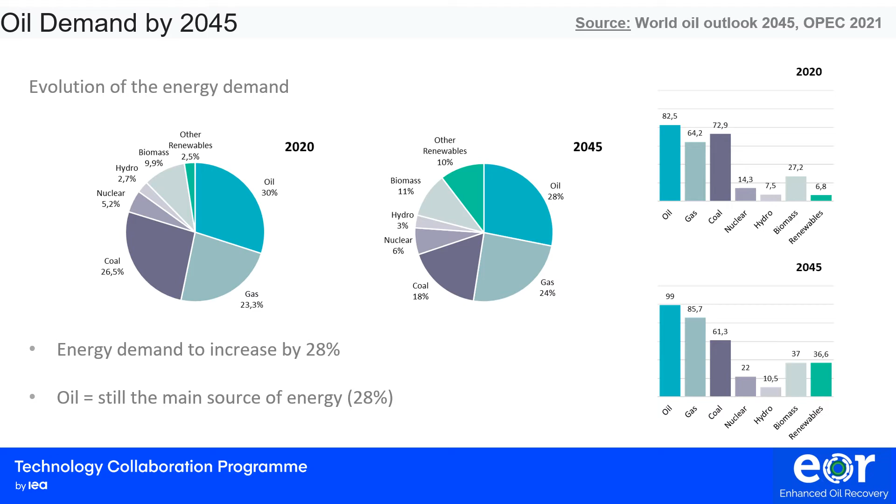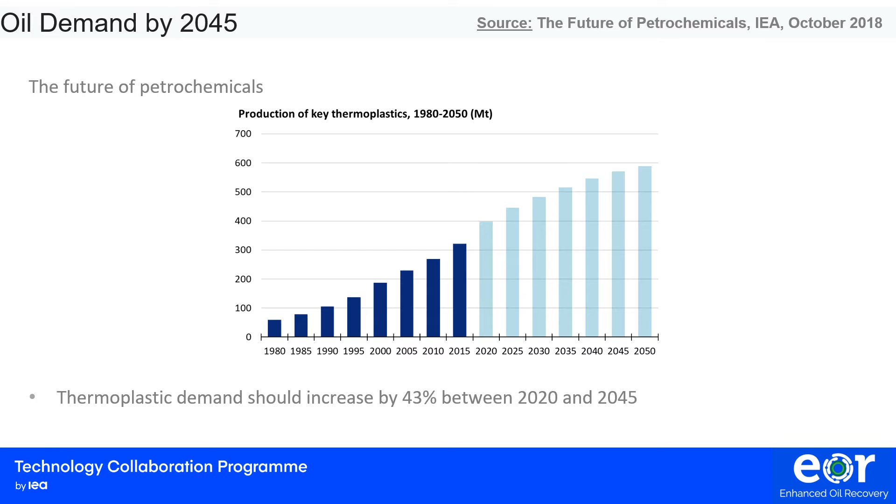Now, if you look at the evolution of the demand for key thermoplastics in the industry up to 2050, you see a constant increase, about 43% between 2020 and 2045. Accordingly, you will also have an increase of the demand for oil for this application.

So if we summarize, we should experience an increase of the oil demand by 20% because of the increase of the energy demand. These projections are even stronger according to the IEO, which reports an increase of the energy demand by 40% in 2045 and an increase of the oil demand by 36%.

We should also have an increase in the demand for thermoplastic, with more requirements and more demand on oil to satisfy this application. So now the main challenge is how do we satisfy the oil demand while oil production from mature assets is declining.

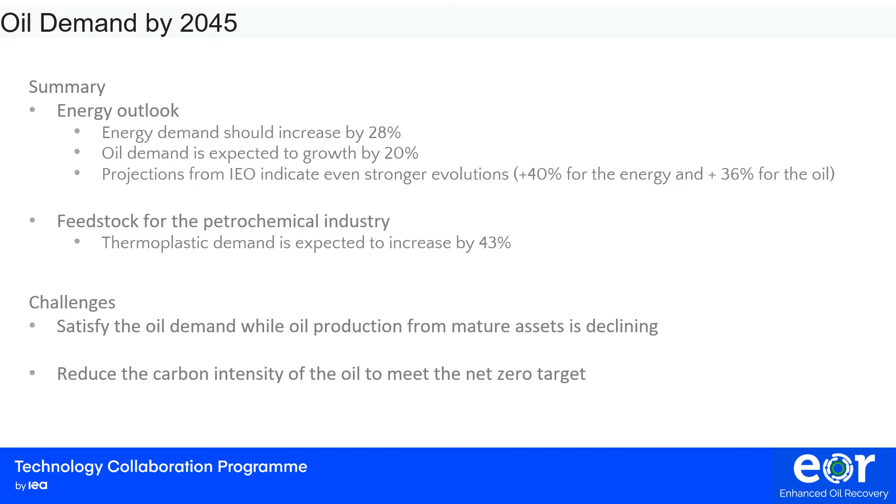And also, how do we combine this challenge with the reduction of carbon intensity of oil to meet the net zero target.

If we look at the position of the oil and gas sector, we can see a fall in investment between 2019 and 2021 by 35%, decreasing from $525 billion to $341 billion. According to Joseph McMonigle, Secretary General of the IEF, we have to get back to the level of investment of 2019 for several years, at least until 2030, to be able to restore the market balance.

According to John Hess, CEO of Hess Corp., oil and gas is part of the solution to satisfy global energy demand, not the problem. He insists that we are able to decrease the carbon footprint of oil by 10% in 10 years, and that the real takeaway is that the energy transition will take a long time, cost a lot of money, and will need technologies that do not exist at the moment.

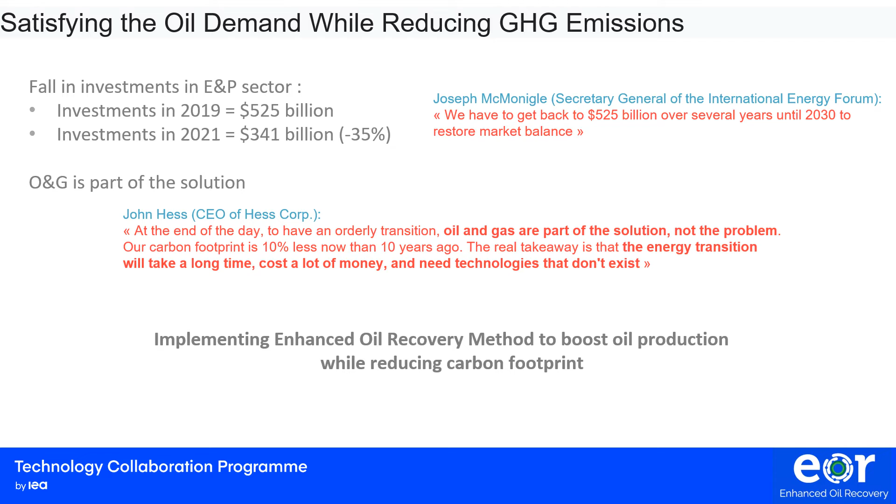So to bring affordable energy to the market and satisfy oil demand in a world with less investment, less discovery, and so on, one of the best ways to do it is to implement an enhanced oil recovery method to boost oil production from existing assets while reducing their carbon footprint.

When you look at the different enhanced oil recovery methods available in the market, one of the easiest to apply is polymer flooding. Polymer flooding is a proven technology with more than 300 applications worldwide.

It consists of adding polymer to the water we inject into the reservoir to better sweep the reservoir and increase oil production. The addition of polymer improves the mobility control between the water and the oil and limits and prevents the fingering of water through the oil.

We have also developed new facilities available in sea freight containers, which can be used to progressively deploy the technology on the field according to the development phase of the project. This equipment can be directly plugged into the existing water network on the field, and you can easily relocate those units as required according to the development you want to apply.

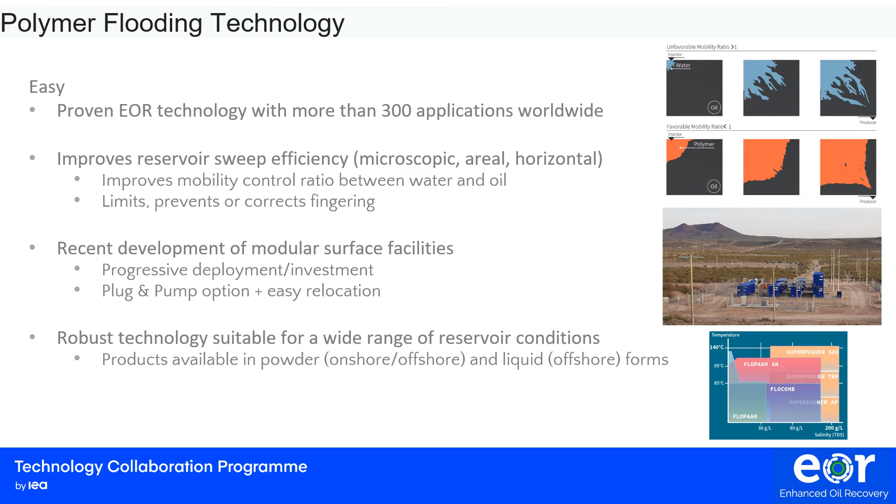Polymer flooding is also a robust technology suitable for a wide range of reservoir conditions in terms of reservoir temperature, water salinity, but also permeability. You have products available in powder form for onshore or offshore application, but also in liquid form, mainly for offshore application where we have poor sea conditions.

Polymer flooding is also cost efficient. It helps to maximize oil recovery. It has been adopted massively in China since the 90s. Then about 12 years ago, it was chosen by India to sustain oil production and satisfy their oil demand, and you have a nice example in Rajasthan, where you can find the largest polymer flood project in the world. Recently in Argentina, YPF reported record production thanks to polymer flooding, especially in Manantiales.

Polymer flooding also has a cost limited to between $3 to $6 per incremental barrel, which allows a decrease in the cost of production of oil for a given operator, and it is way cheaper than exploration and production activities.

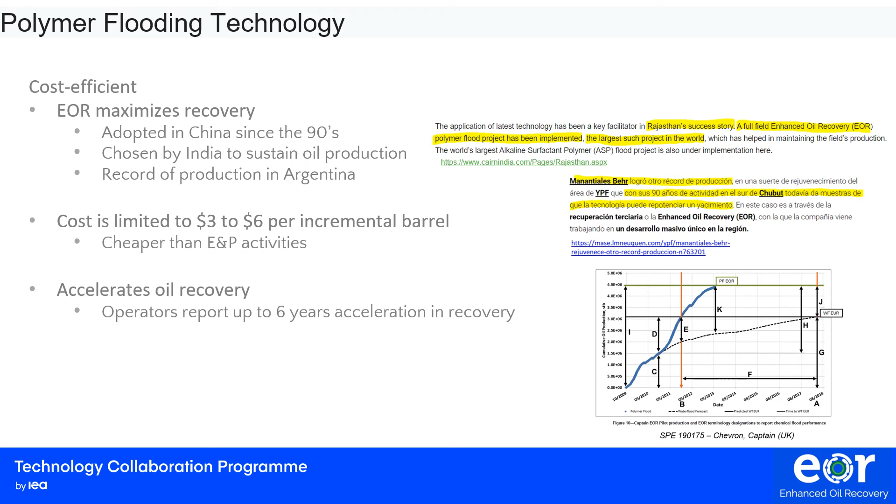Polymer flooding also accelerates oil recovery. These figures have already been shared by my colleague Flavien Galtier, and what you can see mainly in this figure is that on top of having more oil being produced with polymer, you are also able to accelerate this oil production, since what you had produced before with water injection is now produced with polymer flooding six years earlier in this case.

What I want to show you in this presentation is more the sustainable benefits of polymer flooding from an environmental point of view. Polymer flooding is able to reduce CO2 emissions by 60% per barrel of oil produced. It's also able to reduce water use by 70 to 80%. And polymer flooding finally is carbon neutral from a chemical point of view.

To come back on the reduction of water use, here I return to the example from Chevron, but this time not on the graph, but on the table you can find in this presentation. At the bottom of the table, what is very interesting is that you can see that implementing polymer flooding, you are able to reduce water handling by 88.7%, which is considerable.

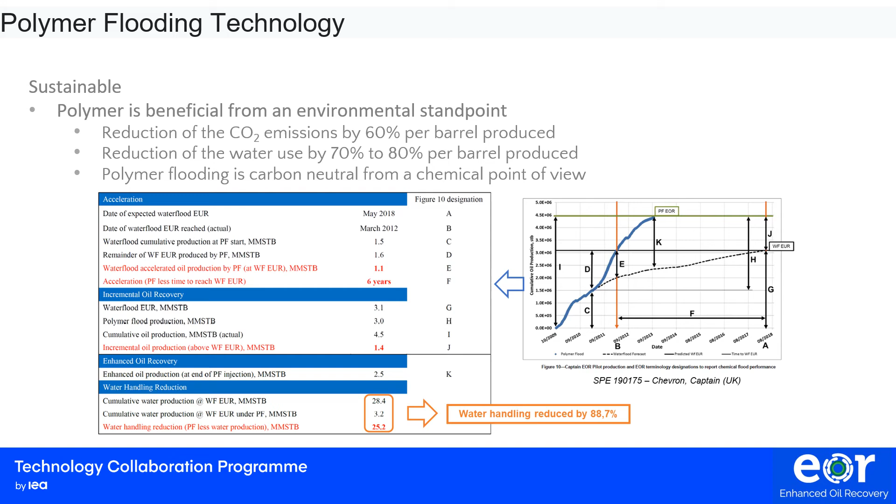Today, if you consider that about 60% of reservoirs are producing water, which are produced under water injection, quickly when you inject water in a reservoir, you have a rise in the water cut, and when this water cut rises above 80 to 90%, you have a massive increase of the OPEX investment and of the CO2 emissions. So if you are able with polymer flooding to reduce this water cut, you are able to reduce the CO2 emissions. Here is an example of that.

Let's consider that you have a water flooding operation producing at a water cut of 90%, and you implement polymer flooding and are able to reduce the water cut to 70%. When you inject 10 barrels of water with water flooding, with a given amount of energy and consumption of oilfield chemicals, you will produce 9 barrels of water and 1 barrel of oil. With polymer flooding, for the same 10 barrels of water and approximately the same level of energy consumed and same consumption of oilfield chemicals, if your water cut has decreased to 70%, you will now produce 7 barrels of water and 3 barrels of oil, which represents an increase by a factor of 3 of the oil production.

Now, if you go back and look at the production of only 1 barrel of oil: if you are injecting water, you will need to inject 10 barrels of water to produce 1 barrel of oil, while with polymer flooding, you will need only to inject 3.3 barrels of water to produce your barrel of oil. So this represents a 67% reduction in water use at the injection.

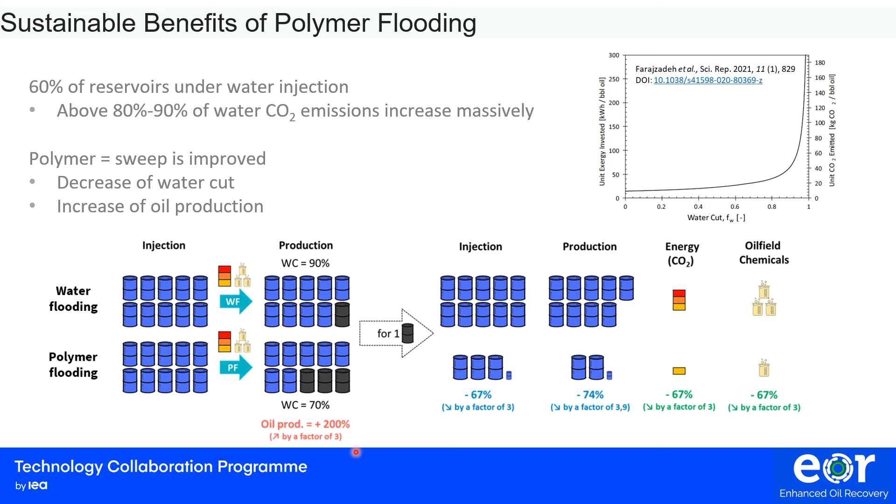As mentioned at the beginning, if you have the same consumption of energy and oilfield chemicals in these two scenarios, you will have a reduction of consumption of energy and oilfield chemicals per barrel of oil produced, which is proportional to the increase of oil production, in this case by a factor of 3.

Let's consider the field case of the Lloydminster polymer flood pilot in Canada. In this pilot, polymer flooding has been applied as a tertiary recovery method. During the primary phase, you have a steady oil production, and after 55 months you have an increase of oil production because of the addition of extra producers.

But you see that you quickly have a decline of the oil production. During this period, the CO2 emissions are limited to about 17 kilograms of CO2 per barrel.

Then we switch to water flooding as a secondary recovery method, and we observe that after switching to water injection, we have an increase of the oil production for 10 months, followed by a production decline.

During this period, you can see a sharp increase of the CO2 emission because of the injection of water and the increase of water cut. You can see values reaching up to 100 kilograms of CO2 per barrel of oil produced.

Then when we switch to polymer flooding, we observe an increase of oil production by almost a factor of 3.5, and a reversal of the CO2 emission curve from 90 kilograms of CO2 per barrel down to about 40 kilograms of CO2 per barrel.

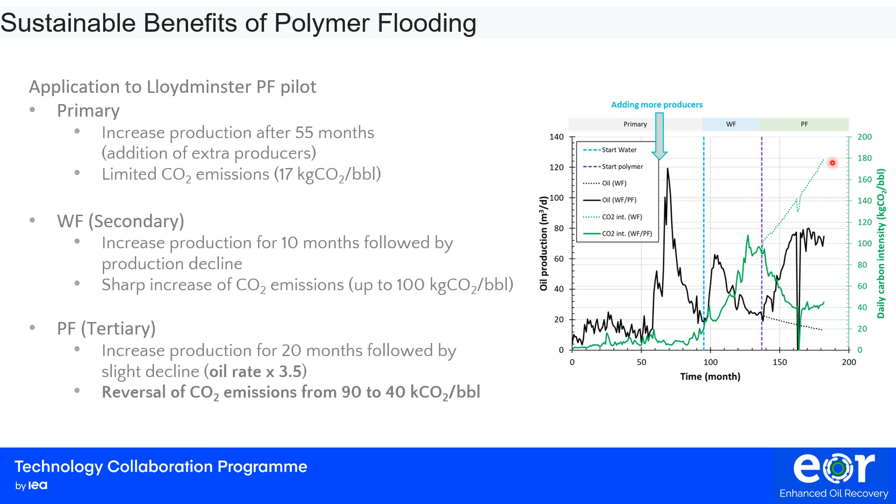What you can see is a sustained oil production with very little decline, and also a sustained level of CO2 emissions much lower than what you would have obtained if you had continued to inject water.

Now, if we look at what happened in Colombia, we can see that several EOR realizations have been implemented: colloid dispersion gel in Dina Cretaceous, polymer flooding in Palogrande, in Chichimene, in Yarigui-Cantagallo, or in Casabe, and even alkali surfactant polymer pilot in San Francisco.

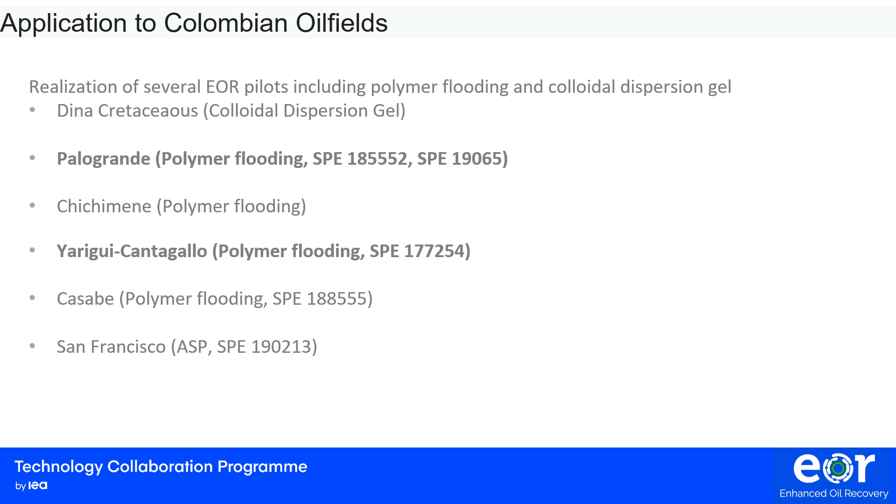On the next slide, I will focus only on Palogrande and Yarigui-Cantagallo to show you the impact on CO2 emission and water use of implementing polymer flooding, according to the publications related to these two applications.

In Yarigui-Cantagallo, we have observed CO2 emissions reduction of 35 to 50% and water handling reduction of 40%. The authors also report that the cost of polymer flooding in this case was in the range of $4.6 to $6 per incremental barrel, which is quite in line with what I've shown you before, about $3 to $6 per incremental barrel.

In Palogrande, the CO2 emission reduction is between 50 to 60%, while the water handling reduction is about 60%. With this cost of polymer flooding estimated between $4.6 to $6 per incremental barrel, you see that polymer flooding is a very affordable method to increase oil recovery, and which is cost efficient even if you were in a period with a low oil price.

Which is not the case at the moment.

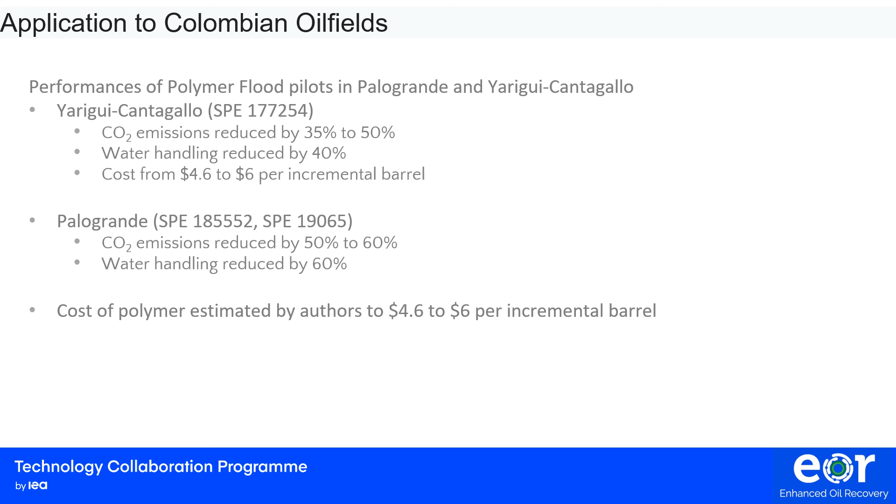So here are the main conclusions of my talk. What we have shown is that polymer flooding is a proven technology to increase and accelerate oil recovery in a wide range of field conditions.

Polymer flooding also presents several environmental benefits. It allows us to reduce CO2 emissions by 60% on average per barrel of oil produced. It also allows us to reduce water use by 70 to 80%. And polymer flooding was successfully applied at a pilot scale in Colombia in several fields.

It allowed Colombia to achieve a similar level of reduction of CO2 emissions and water use as what we observe globally. Polymer flooding is also a cost-efficient technique that contributes to solving the dilemma of increasing oil production to satisfy oil demand while decreasing the environmental footprint of oil production.